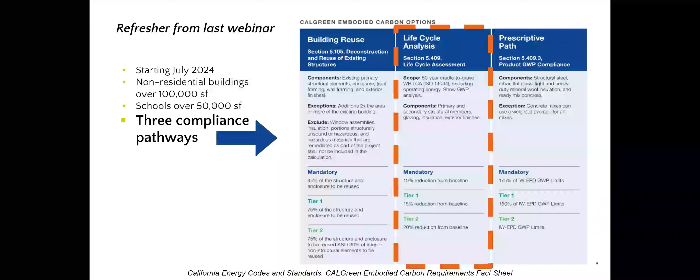As a reminder from last session, this code will be going into effect starting July of this year for non-residential buildings over 100,000 square feet and schools over 50,000 square feet. There are 3 possible compliance pathways. There were a lot of questions last time about what is included and what projects are excluded from this requirement.

So here's a snapshot summary. The recording and slides with much more information and context are hosted on the event page and will be shared once again in the chat.

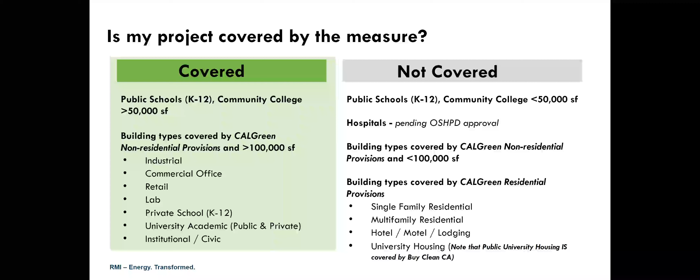Today's program is all about whole building lifecycle assessment. Structural engineers and architects play a pivotal role in implementing CALGreen requirements effectively and shaping the future of sustainable construction.

We will be exploring best practices and practical considerations for practitioners, as well as tools and resources to ensure compliance. There is a lot we could talk about with LCA. The focus of this presentation will be to provide an overview of the topics needed to meet compliance specific for CALGreen. We are cognizant that it is a lot to take in for people new to the topic, but this slide deck and associated resources will be made available so you can access them later. Additionally, there are groups where you can find support and help on the topic. We recommend following up and engaging with your local Carbon Leadership Forum hubs, as well as AIA and SEAOC committees.

In developing this presentation, it was clear that additional supportive webinars will be required, and given the time constraints today, we will not be covering some of the high-level Embodied Carbon 101 or other background climate science information that is more readily available from other resources.

We will be working through a simple example and going through the CALGreen reporting compliance template. A link to this template will be shared with the resources at the end of the presentation.

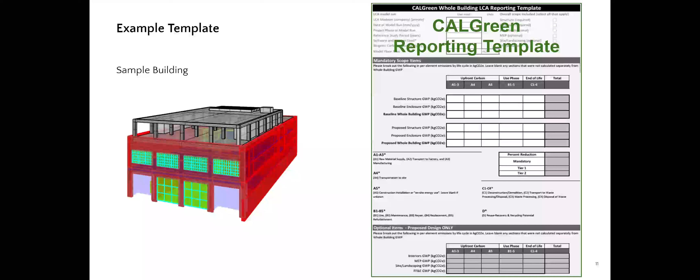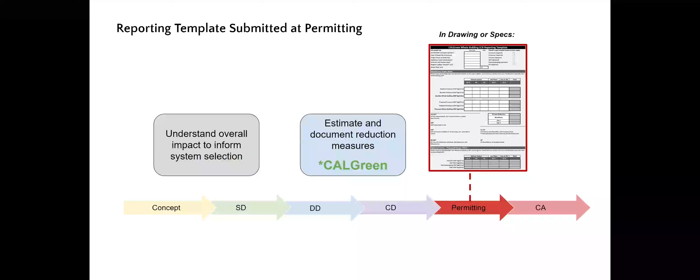And it's important to note that this template will be required as part of the permit package and submitted as part of your drawings and/or specifications, just like it is for energy modeling compliance. This is important to keep in mind with the timing as we walk through the LCA process here.

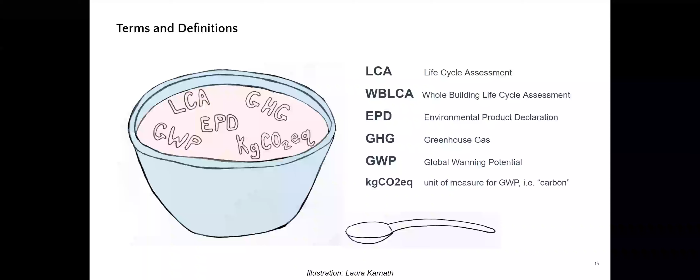And the main unit for reporting global warming potential is kilograms of carbon dioxide. So it's kilograms CO2. You'll see this unit over and over again in this presentation. And if you see CO2e or CO2eq, that's equivalent. Because in the manufacturing of products, there's lots of different types of gases and emissions that may get released, and they all have different units. So it's industry standard to convert everything to carbon dioxide equivalency as the one metric of reporting.

One thing I'd like to clarify, as I've seen a lot of confusion between these two terms, an LCCA and an LCA. An LCCA is a life cycle cost assessment. It is evaluating the cost implications of certain systems and the cost associated with the maintenance of those systems. And LCA is evaluating the environmental impacts of buildings and building products.

And LCA, in fact, has nothing to do with cost. Cost is not taken into account at all. So these are two completely different studies. They're done using completely different softwares and methodologies. And you may have heard the term embodied carbon, obviously, at this point. When we say embodied carbon, we really mean global warming potential. So those terms are going to be used interchangeably.

Now onto my favorite part, some myth busting of things we've been hearing. So you may be thinking, oh God, an LCA is going to cost too much. We can't really afford it on our project. Well, we'd like to share with you that an LCA typically costs a small fraction of project fees, typically less than 1% of the project fee, not even the construction cost, but of the project fee.

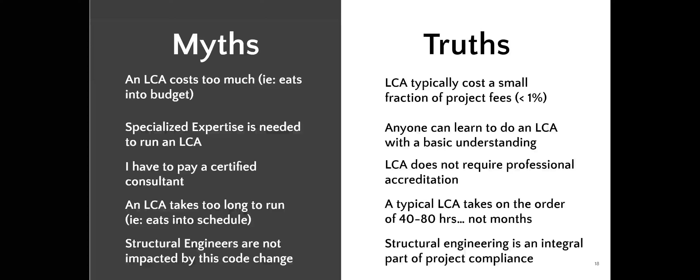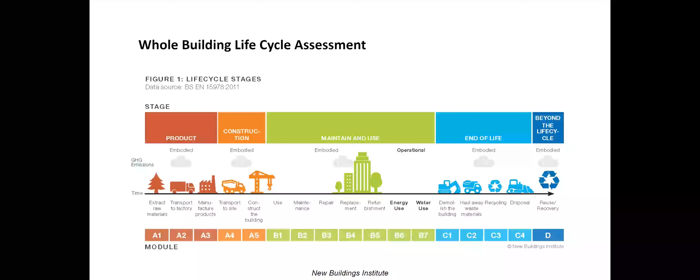Now, the concept of whole building life cycle analysis is actually very simple. We're here to simplify things for you. So essentially, you have a quantity of a material. In this case, let's say it's 100 tons of steel. Then you have an associated global warming potential for each material. So in this case, let's say it's 1,000 kilogram CO2 per ton of steel. So if you multiply the 100 tons of steel by the 1,000 kilogram CO2, you end up with 100,000 kilogram CO2 that represents the overall environmental impact of this specific steel and this amount of steel on your building.

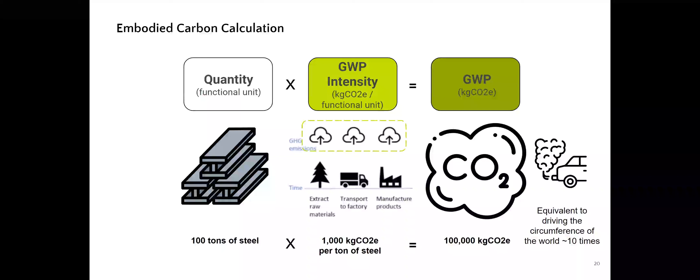Now, if the amount changes and the material changes, of course, these numbers will change. But essentially, in a whole building LCA, all you're doing is you're gathering the quantities of all the materials in your building. You're getting the GWPs, which come from EPDs, as I mentioned earlier, and you're doing the calculation and tallying it all up. All right, we're going to dive into some of the details of that now.

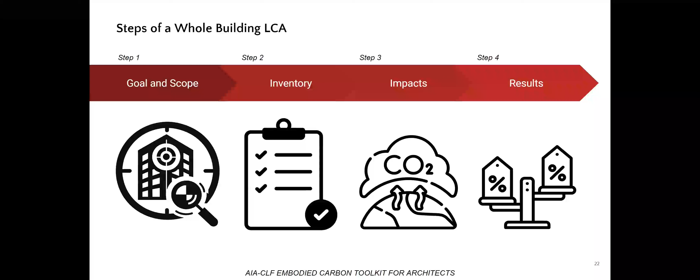LCA can be broken down into 4 basic steps. The goal and scope of the analysis define the rules. An inventory is then completed for the building materials by type and quantity for the elements that are defined in the scope set in step 1. Then the impacts of each material are itemized for that inventory, and results, which should be studied for errors along with the conclusions that you're looking for, documented toward the goal defined in step 1 as well.

First and foremost, important for any comparative LCA, we need to maintain consistency. The goal and scope of every CALGreen compliant project will be the same. We're going to be studying a building over the lifetime of 60 years with a goal of 10% carbon reduction. What is included in this study is known as the system boundary and is comprised of 3 aspects: physical scope, LCA scope, and impact categories.

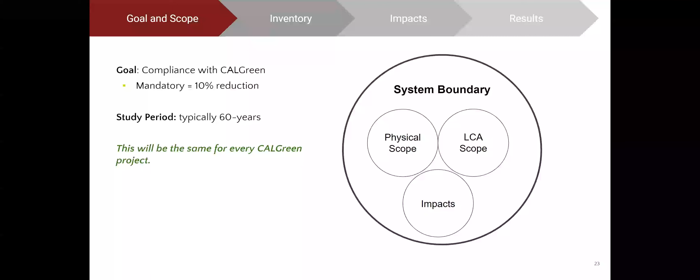The impacts considered in CALGreen: we're only looking at carbon. So while there may be numerous aspects of sustainability that are important, this code focuses only on the climate change causing carbon emissions. All other impact categories, like those that you may have heard from LEED, are out of scope.

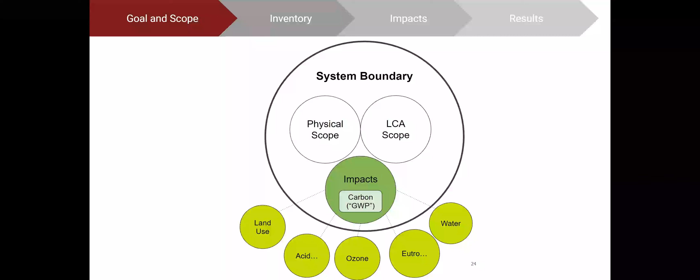LCA scope refers to the stages of a product's life. We have a framework of terminology to communicate this scope consistently. Scope A1 through A3 characterizes the manufacturing of a product. You may have heard this referred to as cradle to gate. Transportation to site and construction on site are known as A4 and A5 respectively. Scope B defines the use of a building over its lifetime, and Scope C defines what happens at the end of life. CALGreen requires whole life carbon, so the carbon emissions of each stage of life be included in accounting.

Assumptions on available data are incorporated by the LCA tool. However, some tools may only have data for cradle to gate emissions and do not have data for the remaining stages. This limits which tools are code compliant. Stage D occurs outside the scope of the building, such as recycling or reuse. This is typically reported separately and not part of CALGreen's requirement.

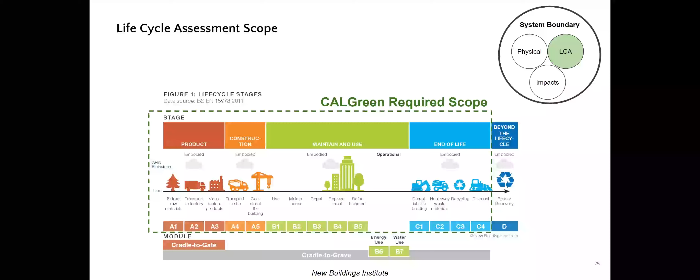The majority of these emissions typically come from cradle to gate manufacturing, which makes a lot of sense because this is where the most energy intensive, carbon intensive processes occur, often out of sight and out of mind.

The physical scope is what is physically included or excluded from your model. CALGreen is modeled off of LEED requirements, which includes structure and enclosure, making collaboration between architects and structural engineers so important. Other elements of a building, such as mechanical systems or interiors, are optional but not required. The term whole building lifecycle assessment is a little bit deceiving in this regard because it refers to LCA scope, not the physical scope. A full list of OmniClass elements will be provided in the CALGreen guidance on AIA's website.

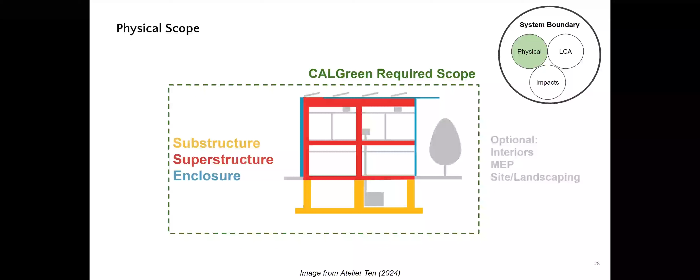One example of where we draw the line could be with the facade. CALGreen defines the interior skin, i.e. the gypboard, as part of the facade to be included, whereas you wouldn't have to include something like the paint, which is part of the interiors, the finishes. Here's just a summary overview of the full system boundary.

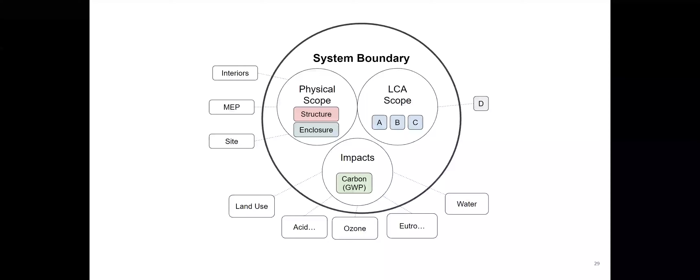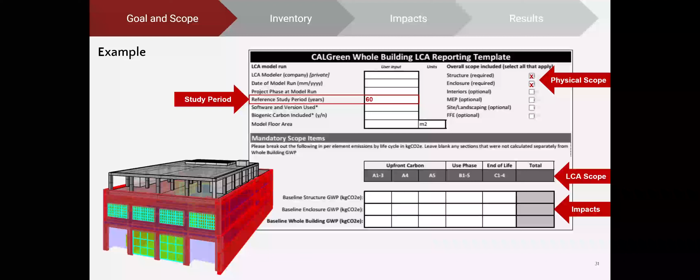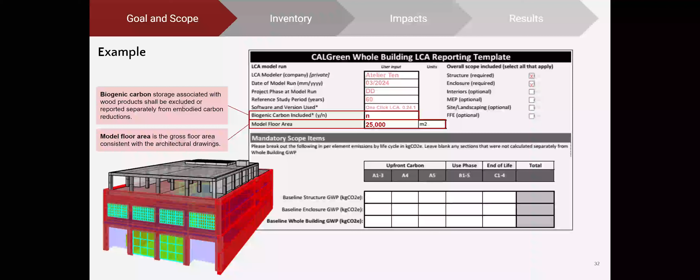The remaining inputs in that first section are mostly straightforward and specific to your project. The worksheet does ask if biogenic carbon is included in your analysis, to which the answer will usually be no. According to the code, biogenic carbon storage associated with wood products shall be excluded or reported separately from your embodied carbon reductions. And biogenic carbon is a deep topic that we don't have time to cover today. So practitioners should make sure to research and understand this topic before including biogenic carbon in their analysis. And then that model floor area is the gross floor area consistent with the architectural drawings.

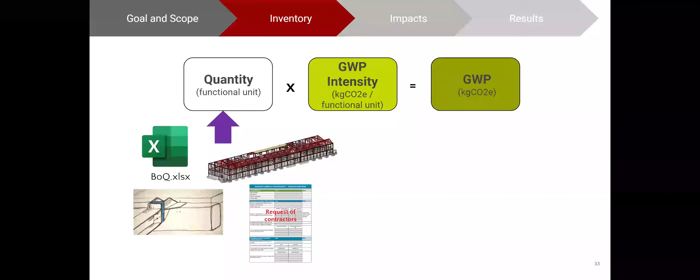All right, unlike the goal and scope, the building inventory and impact factors will be unique for each project. Building quantities come from a number of sources, such as drawing takeoffs or contractor provided quantities, but most commonly today, this information will be captured in your BIM model. Because our Revit models only capture what's drawn, it's often important to supplement these quantities with some calculations for products like rebar that aren't modeled. Now, you don't have to count every bolt and drive yourself crazy. There is a threshold proposed by ASHRAE 240P, which defines any building element contributing more than 1% cost or mass to the building, or structural elements representing more than 5% of the structural system be included.

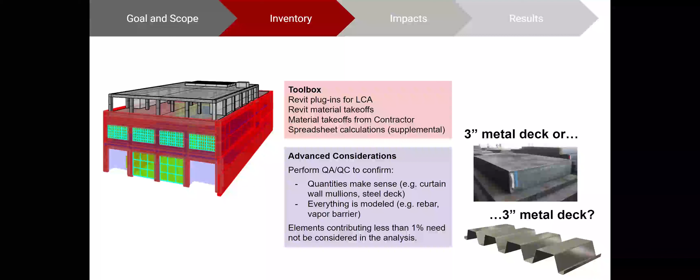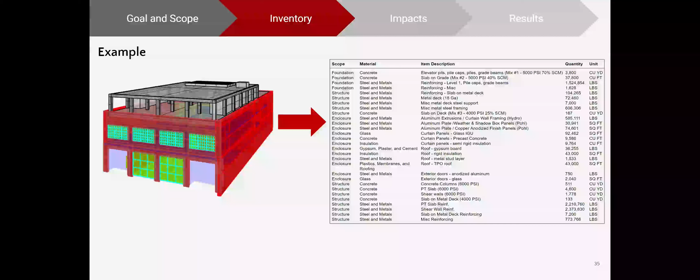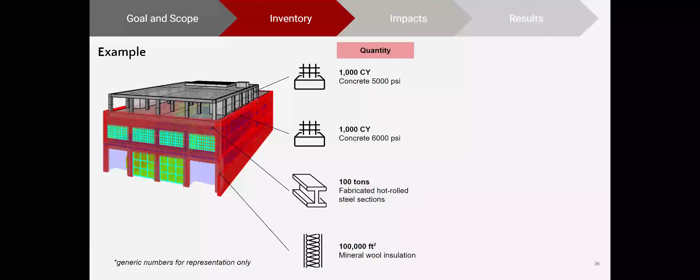It is critical to vet your quantities and ensure accuracy. Mistakes are common and often happen at assemblies like composite decks or foundations that are modeled as masses. Make sure your results are consistent with your judgment. Otherwise, you can end up with some very different results for something like a 3-inch metal deck here. So here's what those material takeoffs might look like. Distinction should be made between different materials. So for example, a 5,000 PSI concrete in the foundation versus a 4,000 PSI concrete in the slabs, because those different materials will also have different GWPs. And then for this webinar, we'll work with these simplified numbers and just pretend like that is the whole material takeoff so that we can work through the example together.

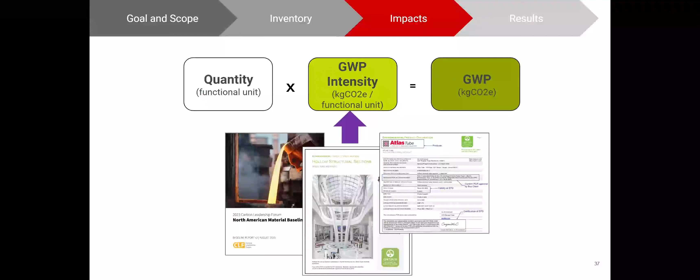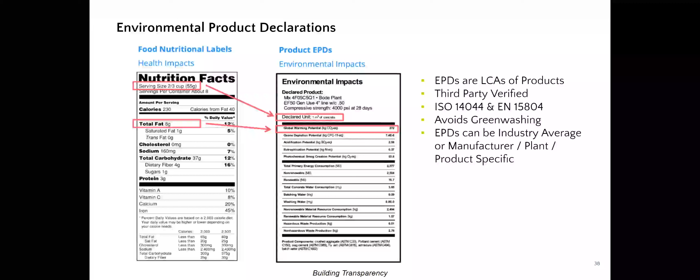So once we have our quantities, what is the actual impact of these materials? Impacts from manufacturing are defined in EPDs. EPDs are like nutrition labels. The functional unit is like a serving size, and the global warming potential like the calories for that product. EPDs only cover cradle-to-gate emissions. The remaining stages use other background data sets to fill in the rest. For example, a whole building LCA tool will attribute an assumed travel distance for a given product based on government data. It would also assume a rate of replacement, which for the structure is generally the life of the building, but for something like facade elements could be more like 20 or 30 years. Those emissions would occur during the B stage, the use phase, and occur over the 60-year life of the building.

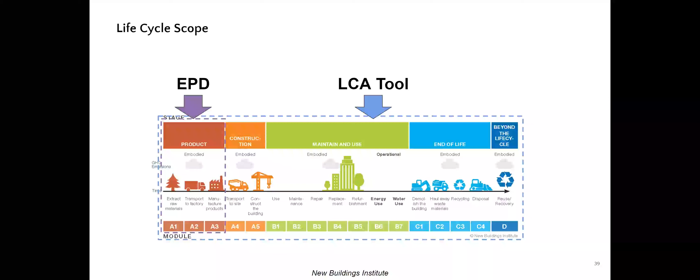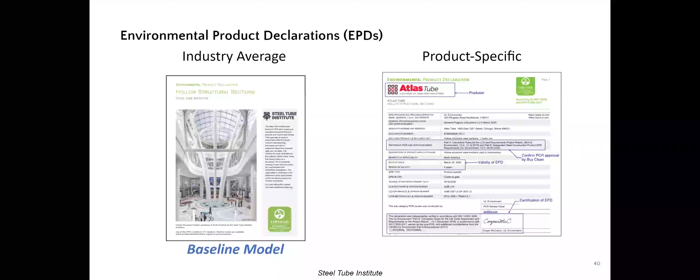There are two types of EPDs. Industry average EPDs are developed by industry organizations like NRMCA or AISC, who collect data from their constituents and share the average impact. Product-specific EPDs are published by individual manufacturers for their product. This is like if you had a class of students who take a test, the industry average would be the class average, and product-specific EPDs would be like the individual test scores. Industry EPDs are applied to your baseline analysis, whereas product-specific EPDs can be useful in proving a reduction from the average.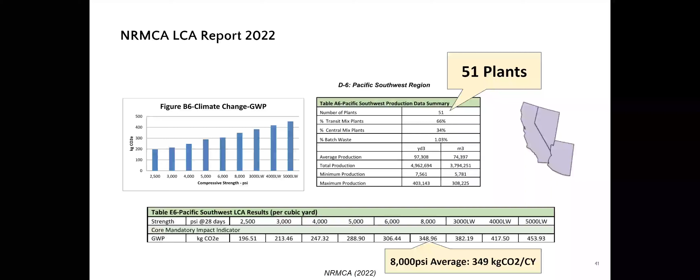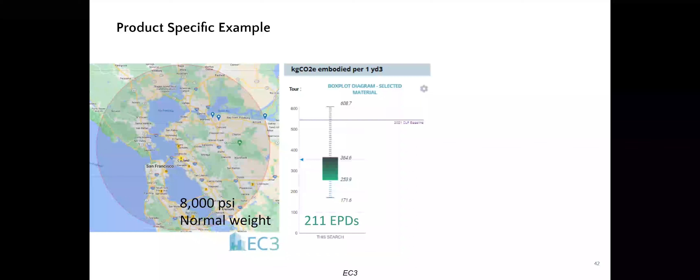You can find product-specific EPDs in some LCA tools. This takes into account the variation in individual mixes and can be very important in proving carbon reductions from what's typical. Here's a quick study from EC3 of available EPDs around the Bay Area filtered by 8 KSI concrete. We can compare this to the NRMCA regional average and select a single EPD. For this mix in particular, we can see 322 kilograms per cubic yard reported in that EPD nutrition label.

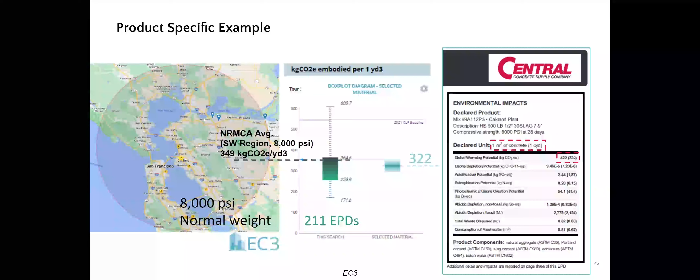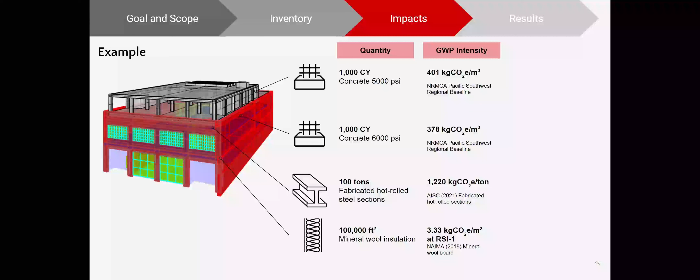So going back to the example, each of the distinct materials with its own material quantity also has its own GWP intensity. And the intensities shown here are just for modules A1 through A3 from the 2023 CLF baseline, which we will link at the end of the presentation. These GWP intensities can be found in EPDs or in your LCA tool, and this gives us all the information that we need to get to our final results.

So to obtain the GWP, we then multiply the quantity by the GWP intensity and do the appropriate unit conversions. So for example, the concrete quantity was in cubic yards. The concrete GWP intensity is expressed in kilograms of CO2 equivalent per cubic meter. And so to get a value in kilograms of CO2 equivalent, that first quantity needs to be converted to cubic meters. So always make sure that you're using the right units throughout.

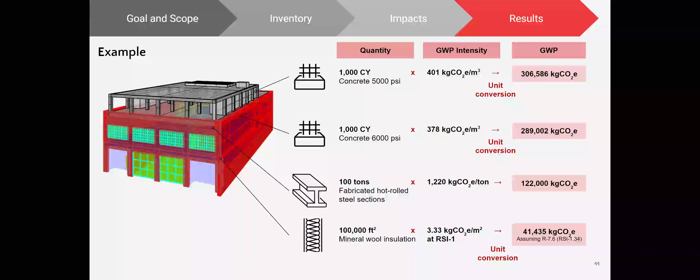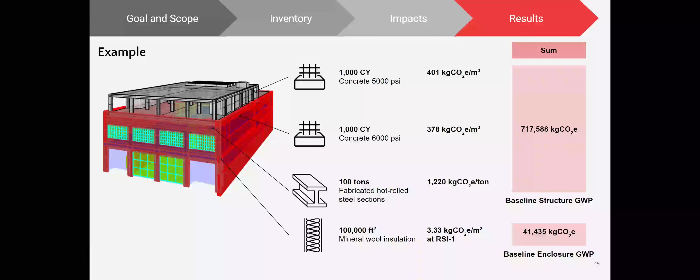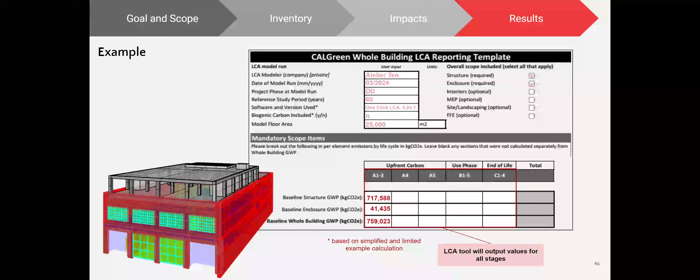And in general, this calculation will happen inside of the LCA tool. We just wanted to run through an example so that you understand what happens inside the tool and what the mechanisms are. And then we can add up all the GWP values for the structure to obtain the baseline structure GWP, and the same for the enclosure. And then we can enter those values in the sheet and add them up to obtain that baseline whole building GWP. The values we calculated in this example, as I mentioned, were just for modules A1 through A3. So your LCA tool will output values for all of those stages.

While the simple calculation is useful when teaching the basics of LCA, it is important to mention that there are other factors in the analysis. This could include transportation mode or distance and means of transportation to site, as well as on-site waste factors. Although in the majority of cases default assumptions may be appropriate, that is not always the case. As more accurate information is known about the project, the analysis should be updated. In some cases, such as transportation of mass timber, this can actually have a significant impact on your results.

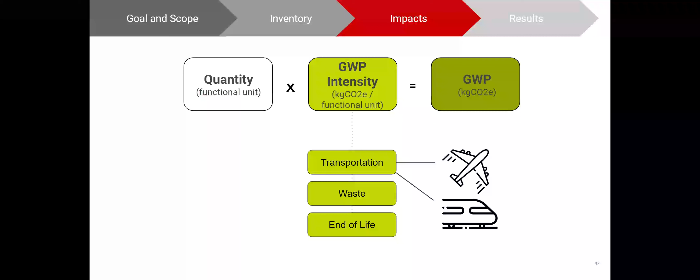We had a project in the last couple of years where the facade had to be flown in rather than taken by rail, and it nearly blew the carbon budget out of the water. So always be on the lookout for those one-off cases or things that intuitively you think might be high emissions. And it can also be good practice to test the sensitivity of your results if there's a known uncertainty on the project.

Okay, so now that we've covered how to run an LCA and some of the basics there, you may be wondering, okay, great, how do I achieve the 10% reduction? So we broke it down into 4 simple steps. One is setting a baseline. So when we're talking about 10% reduction, the important question is reduction from what, right? So there needs to be a baseline that is set, that I'm going to talk a little bit more in detail about. Then you evaluate reduction measures throughout the design process, different ways to reduce embodied carbon through different materials.

Then you run your proposed LCA to see how your proposed design compares with the baseline design. And this is a check to see, are we getting the 10% reduction? Are we there yet or not? Don't be surprised if you don't get the 10% reduction on the first try; oftentimes there needs to be a combination of reduction measures applied in order to get to 10%. And of course, repeating, this is a reiterative process.

I like to compare it to the energy modeling process that many of us are familiar with now. You know, you don't wait till the end of the project to run the energy model and just cross your fingers you're going to meet Title 24. No, you start working with your MEP engineer earlier on to make sure that you're on track to hit those goals. So very similar here.

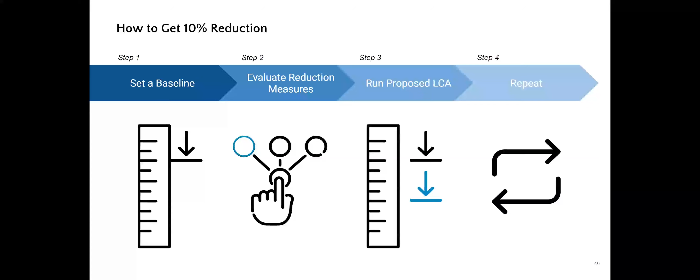Now, in terms of setting the baseline, let's talk about that a little bit. Unfortunately, there's no industry standard yet for setting a baseline for embodied carbon analysis. CALGreen does give some guidance, and it's called a functional equivalency. That's just a fancy term for saying that the baseline building should be comparable to your building in terms of what a conventional building would look like, right?

So the question to ask is, if I were to design and build this building business as usual, what kind of structure would the building have? What kind of materials would it have? What type of construction would it be? So for example, if it's an office building, it might be a steel structure typically. So that's really important. And also keep in mind the size of the building must be the same. The size and program must be the same as what you're designing.

And the GWP factors also for your baseline come from the industry average EPDs, as Luke mentioned. So when you're setting your baseline building, you're just assuming a conventional building built business as usual with some industry average products, right? Nothing too crazy, nothing too bad, nothing too good. So that's the baseline.

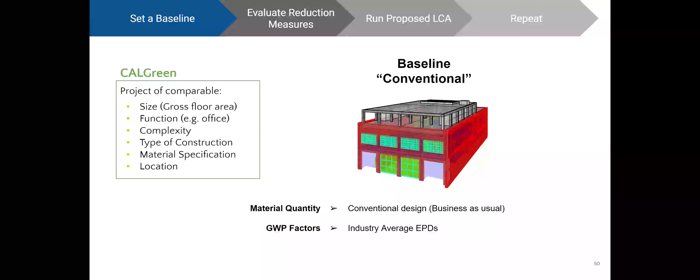I might add one thing on this one, which is on that list of comparable things, it says material specification. One distinction that's been made in CALGreen compliance is that you can still compare buildings of different materials. So you could compare a steel building to an alternative mass timber building. Just one note that people could get hung up on there. Only if the steel building, though, is how it would be conventionally built. Exactly.

So then you move into evaluating reduction measures. As you can see on this graph, the sooner you evaluate reduction measures for embodied carbon, the more impact those moves will have, right? So the more opportunity you have for reducing embodied carbon. We recommend starting even in conceptual design and schematic design, when you're making those big decisions about the structure, those can have really big impacts. Those are not things you can change easily down the road. So as the project moves forward, the opportunities for reduction get smaller and smaller, although you do still have an opportunity to get reductions even in the procurement and construction stage. So you first look for reductions in design, then when you go into construction, there's some opportunities there as well that we'll cover.

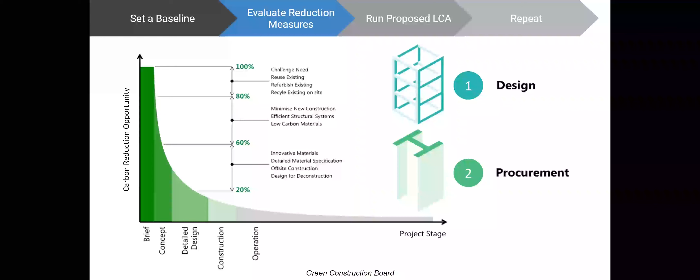And we want to make sure that the reductions are measurable and documented, right? It's really impossible to claim reductions if it's not documented anywhere. So for example, embodied carbon limits for specific materials should be listed out in your specs, project drawings, or even in your materials sheets. They should be documented - for example, getting EPDs from the contractor on what is actually installed. Those are ways to measure and document and show that, yes, we did actually use better products than conventional standard products, for example.

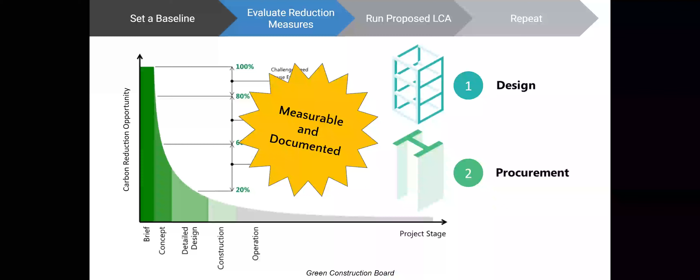And so once you have your baseline model, now here's the fun part where we can do a hotspot analysis. There's millions of products in any building. It's impossible to optimize every single product, right? So the smartest thing to do is to look for areas where there could be the biggest impact. What are the biggest contributors to emissions in this specific building is the question you want to be asking.

And you can look at this a couple of different ways. You can break it down by building components, for example, looking at floors versus walls. Oftentimes floors will have more embodied carbon than walls simply because we tend to use lots of concrete or carbon intensive materials in floors. So if that's the case, then you can say, okay, we're just going to focus on optimizing our floors and getting the 10% reduction just by that. Then you can go down that path.

Or you could evaluate it based on the materials in your building, like you see on the screen here. What I will say is that in this case, you want to focus on the largest quantity of materials, because the whole building LCA at the end is a weighted average calculation. So the largest quantity of materials, if you can focus on reducing the carbon impact of those, that will have the biggest impact on your whole building LCA reductions. In this case, you can see that the biggest impact is the steel beams, the lightweight concrete deck specifically, and the aluminum in the storefront or curtain wall panels. So then you can say, okay, we're going to focus on optimizing these 3 items.

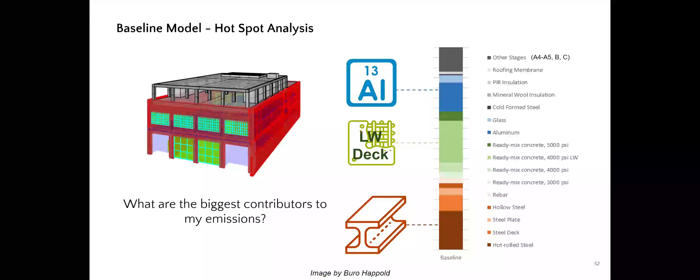So some examples of good practice versus bad practice. Good practice would be, for example, the structural engineer and the architect working closely together at the beginning of the project, in schematic design, when you're choosing the structural systems, to identify which type of structural system is best, but also maybe even drilling a little bit farther on optimizing bay sizing. This could be a huge lever that you can only pull in schematic design, for example. Optimizing bay sizes not only allows for optimal program functionality, but also could reduce embodied carbon - could be a strategy to get to 10% reduction. So that's always a good practice, and you always want to be comparing different types of structural systems early on.

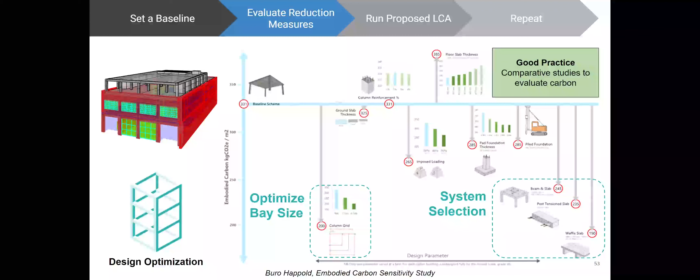Bad practice would be setting a baseline for a structural system that would never be used on this project. For example, multifamily buildings in LA typically have a PT slab floor. It would be bad practice to set your baseline as a conventionally reinforced slab—that wouldn't be appropriate. I also hear from contractors, hey, do we really need to worry about this 10% reduction? We could just set a really bad baseline so you can get the 10% reduction super easy. That's bad practice, that's not recommended. It should be a baseline that reflects what would actually be built.

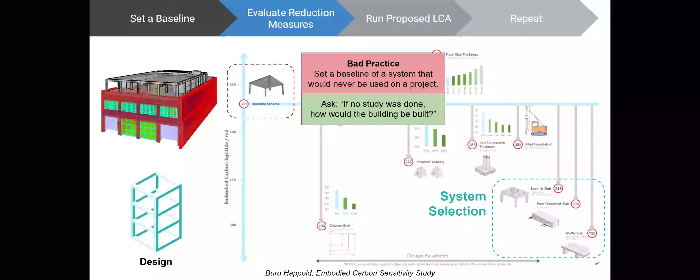Another opportunity for reduction is the concrete mixes. Concrete, and specifically the cement in concrete, is super carbon intensive. No matter what kind of structural system is in the building, most buildings will have concrete footings, so there's still a substantial amount of concrete in the building, and the concrete footings are actually a great place to start optimizing and reducing the amount of cement in the concrete mixes.

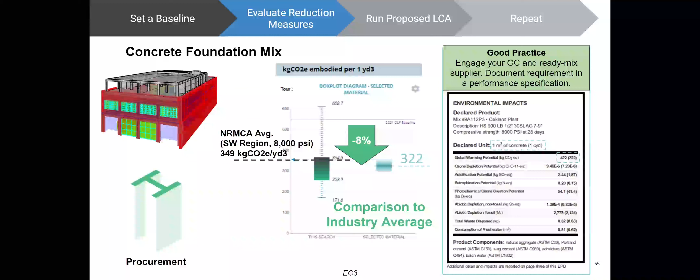We could have a whole webinar about this, honestly. This is a very intricate process, and there are multiple things that need to be done to ensure the right mix is actually poured at the end of the day on the project. As you all know, many things can change throughout a project. So getting embodied carbon or GWP limits into the specs for the concrete mixes, and working closely with the contractor and the concrete supplier if you know who that is early on, is a really great strategy to pick an appropriate target for your mixes.

And then you want to make sure that's actually getting installed by getting the EPDs. Now, a bad practice would be if you just go on EC3 and pick the lowest carbon EPD for that concrete mix and say, okay, this is what we're going to go for, without checking with the GC or the concrete supplier on whether that's even available. Because concrete is obviously very regionally specific, and it's highly dependent on which supplier you're working with and whether they have the capabilities and infrastructure to make low carbon concrete. So you always want to work closely to set a realistic target and then follow that through collaboratively.

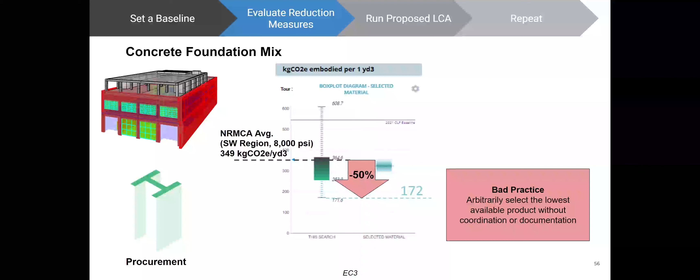So a summary of different reduction measures available in the design phase and the procurement phase, as we've been covering. This is certainly not an exhaustive list. But in the design process, optimizing the structural system, the bay sizes, optimizing the concrete mixes, reducing skin to floor area ratio could be a really great strategy because, as Luke mentioned, envelope is included in the scope of the whole building LCA for CALGreen. One way to optimize that would be to optimize the facade support structure.

Then when you go into procurement and construction, there are different opportunities—specifying specific GWP limits and requiring EPDs to be provided by the contractor, type 3 EPDs specifically, and engaging the ready mix concrete suppliers to make sure you're getting the best mixes.

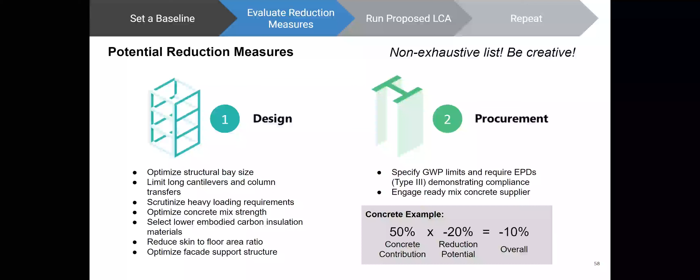A quick note on the weighted average calculation for whole building LCA. For example, if 50% of the building is concrete, and you determine by talking to the contractor, engineer, everybody on the team that you can get a 20% reduction in embodied carbon for the concrete mixes—which is fantastic—that means when you run the whole building LCA, you may only get about a 10% reduction for the whole building, because that analysis takes into account not just the concrete, but all the other structural and building enclosure components. So just keep that in mind.

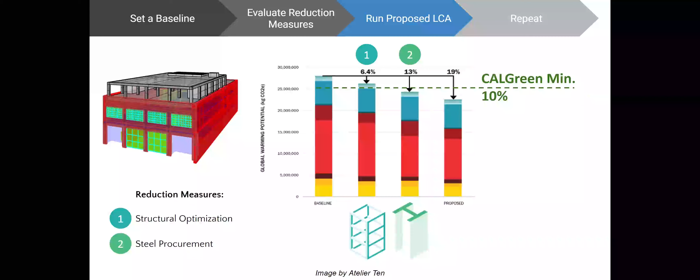This is an example of how you can use iterative measures throughout different phases, from design to procurement, to achieve an overall 19% reduction in embodied carbon for the final proposed design, which clearly meets the CALGreen minimum of 10% reduction. So you may have to use multiple different strategies to get there.

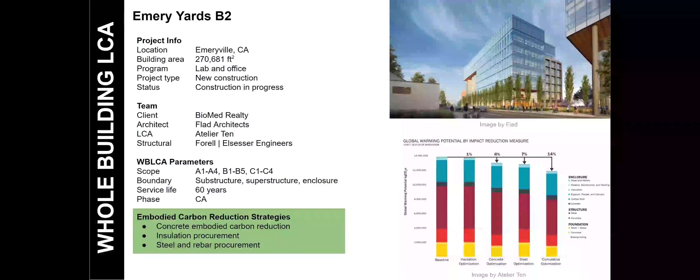An example of a project that has successfully achieved at least a 10% reduction in embodied carbon is Emery Yards Building 2 in Emeryville. This lab and office building by Flad Architects implemented a combination of concrete embodied carbon reduction, insulation procurement, and rebar procurement to get a total reduction of 14%.

Oops, sorry, I was on mute.

This process should be repeated, right? It's reiterative. Think about how you do reiterative energy modeling throughout a project. You can do reiterative embodied carbon analysis. Now, it doesn't have to be a whole building LCA. I'm not saying you run four whole building LCAs throughout the project. What we're saying is that you can do comparative studies of specific elements like structural bay sizes or different types of insulation and see how much reduction you can get in those individual components throughout the project, so that in the end you can add it all up and get to the 10% reduction.

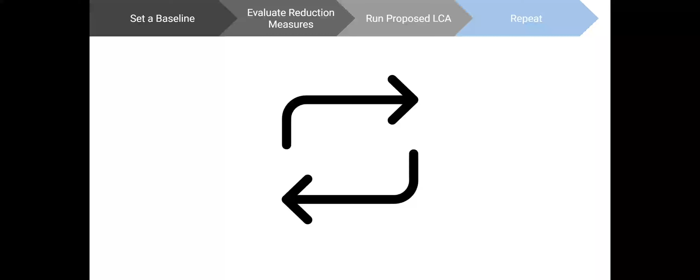Okay, my favorite part again, some myths. I've heard this from architects typically: okay, great, I'll just go ahead and source all the materials locally, and certainly that will hit the 10% reduction because of all the emissions from transportation. While I definitely want to encourage everybody to use locally sourced materials, sometimes that's not enough.

A lot of times, transportation is the least impactful category in an EPD. Now, I want to clarify this. We're not saying that transportation doesn't have any impact. It's just that the impact from A1 to A3, which is extraction of raw materials and manufacturing, is so much bigger than the impact from transportation. So oftentimes transportation impacts get dwarfed by A1 to A3. Just keep that in mind.

But as Luke mentioned earlier, there are cases where transportation may make a big difference, so evaluate this carefully. Some of you may also be wondering, okay, I can just design my project and try to optimize resources and be really efficient, so we're just going to do the LCA at the end of the project. This is definitely not recommended. It's pretty risky because there's a very good chance you're going to get to the end of the project, run the LCA, and not meet the 10% reduction. At that point, there's minimal things you can do. You might get lucky, but it's not recommended.

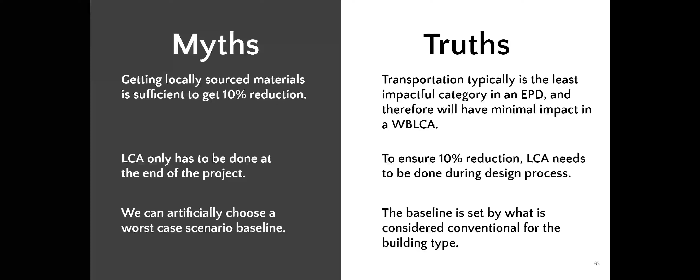Thank you, Avide. Thank you, Isabel.

We're going to take just a couple minutes here to talk about demonstrating compliance, and we're going to bring this graphic back. It's important to pick the right tool at each stage of your analysis, and at this point there are a lot of tools out there. Some tools like Epic or Kaleidoscope can be really helpful early in design to understand the overall impact of your project and assess important design decisions.

Other tools, like EC3, have an extensive EPD library and are great for tracking material procurement later in construction. However, only tools that include the data from scopes B and C that we were looking at earlier meet the compliance requirements of CALGreen. As previously stated, this form needs to be included in your permit set in the drawings and/or Division 1 specifications.

And just to reinforce some of Avide's points there, it really is important that you be doing iterative modeling through to the design stages. There's significant risk in waiting to do LCA until CDs or into construction, because the influence on design and procurement is significantly diminished. If you can't meet the whole building LCA pathway, you're limited to other compliance pathways like the prescriptive path, where it applies to more products with a GWP limit. You probably have a less environmental impact, and there's greater risk to cost or schedule than if you had coordinated these considerations up front with the contracting team.

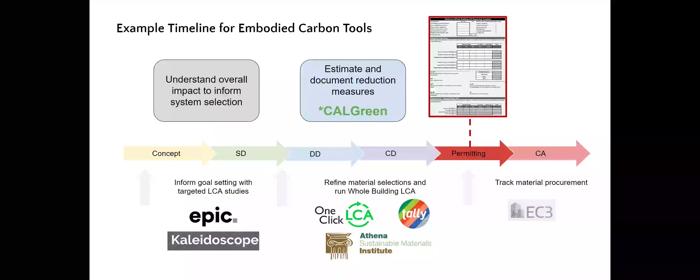The landscape of tools that are available continues to change, and new tools become available or existing tools get built out further. Currently, there are three major tools that meet compliance that people use: OneClick, Tally, and Athena. These tools have varying pros and cons, as well as underlying assumptions and background data sets. Generally, you should not compare results across different tools. We're not recommending any specific tool here, but we do recommend that you discuss functionality with other practitioners when considering what tool best fits your workflows.

As I said, there may be other tools that are useful - this is a non-exhaustive list, but it highlights the tools that are compliant for CALGreen. Some tools that are compliant for CALGreen but not as commonly used are GaBi and SimaPro. Those meet the ISO requirements for CALGreen, but they're typically less common for buildings - more typical for developing things like EPDs. We'll certainly be talking a lot more about this, and perhaps have our own webinar just about tool usage.

Luke, just chiming in real quick on the tools. I know there was a question for those using AutoCAD or SketchUp - do I need to be using Revit? No, you don't need to use Revit, but as you can see, it does make it a little bit easier because there's plugins for Revit. If you're in some other program, you may have to export the material quantities or get takeoffs from the contractor in order to run the analysis.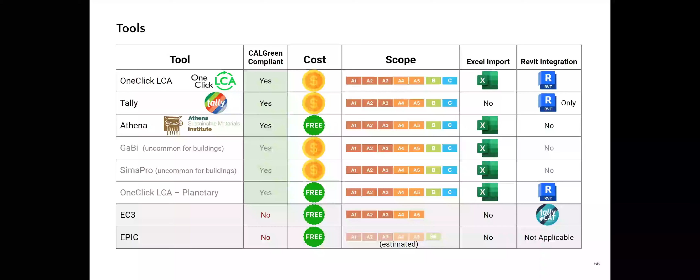Yep, the only tool that requires Revit is Tally. It's just functional within Revit. Thanks for calling that out. And we've made it now.

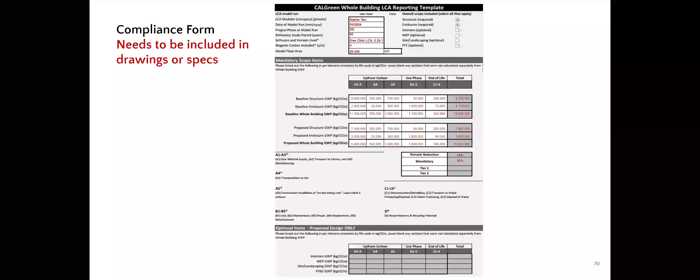Here we have our completed compliance form. Thank you, everyone. We have one more section here. I'm going to bring up Laura to talk about resources and working groups. Thanks, Laura.

So we've covered a lot in this webinar that we can't cover everything all in one webinar. So we're sharing some resources on embodied carbon and LCA for all of you. There are a lot of great resources out there. These are just a few, and the links for them will be posted in the chat. So first of all, we have a link to the code. Make sure you check out what the code language says.

There are also some good guidance documents out there. If you're just getting started on your embodied carbon journey, the AIA and the Carbon Leadership Forum have worked together to publish a 3-part embodied carbon toolkit for architects. And a lot of the resources we have up here are from the Carbon Leadership Forum. They're an organization dedicated to reducing embodied carbon in buildings and materials. That's what they do - they produce research and resources related to embodied carbon, and it's a great first stop if you want to learn more about embodied carbon and LCA.

The CLF also has local hubs in a lot of cities where professionals from across the AEC industry gather to share knowledge. When you're ready to dive into LCA, the CLF has also published an LCA practice guide. It was also mentioned briefly earlier in this presentation that they have published material baselines. So the CLF material baseline report collects industry average embodied carbon data for a bunch of different materials and gathers it together all in one place.

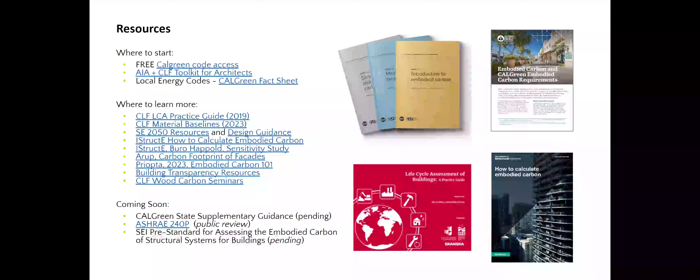So in addition, as you learn to do LCA and use LCA softwares, there are some resources available to help. There are 2 existing LCA user groups where people gather to share knowledge around LCA. There's currently one in Seattle that's hosted by the local Carbon Leadership Forum hub there. And there's one in Boston hosted by Built Environment Plus.

The Carbon Leadership Forum Los Angeles hub, which Luke and I are co-leaders of, will be launching an LCA user group really soon. So if you'd like to be part of that and be notified when it launches, we're going to share a link to sign up in the chat for the CLF LA newsletter so that you can get notified when we get that up and running. So before I turn it over to Luke to wrap it up, I just want to really encourage everyone to use this as an opportunity to connect and to share knowledge and really make a difference on our projects.

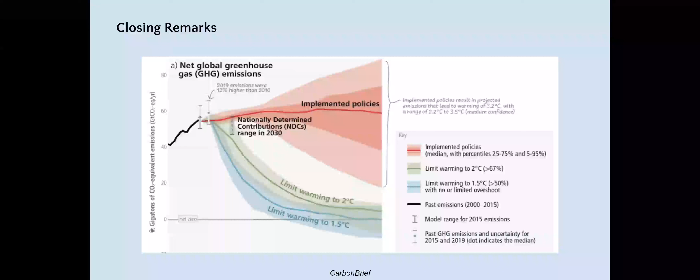Okay, thank you. That was a lot of really great information. Okay, so there was a lot of questions about the baseline building, so I'm gonna focus on that first. So is the same building modeled with conventional means or another building you can find that is the same size? And would it be reasonable to set the 75% SD model as a baseline or any similar early design phase model?

I want to add something to the 75% SD model as a baseline piece. That is a good way to do it, but what I would add to that is that sometimes in SD you're carrying some contingencies or allowances in material quantities that get reduced as the design progresses. So when you update the LCA, you want to make sure that you're not counting those contingencies that you're no longer carrying as reductions.